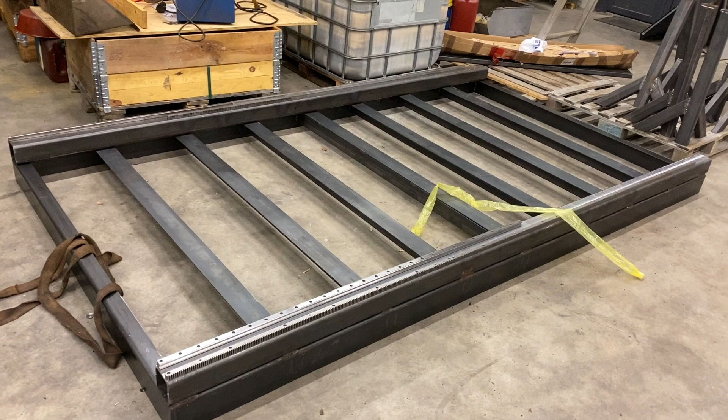Now I think we should concentrate on that CNC router, which is the thing I've been working on quite closely in the last few weeks. But let's first check the CNC frame we did a couple of months ago.

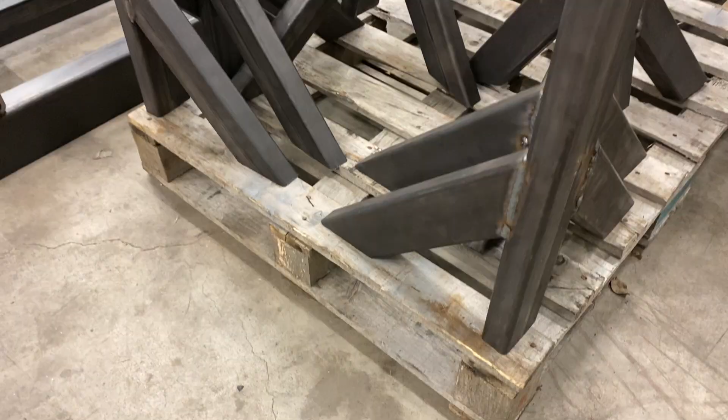So the frame you see here is a very heavy steel frame that now has been machined with very high precision to fit the linear rails and racks you see here. After the last video, I purchased the racks, and there are now mounting holes machined into those racks as well, and they seem to fit perfectly.

Last video I also put the legs together, but after that we concluded they may not be needed after all, because the purpose of this machine is to cut pieces from large plywood sheets.

It actually feels easier to use the machine when it's just on the floor, so you don't have to do any heavy lifting to get the plywood on top of the machine. But I will still stash the legs for later use if we decide someday to use them.

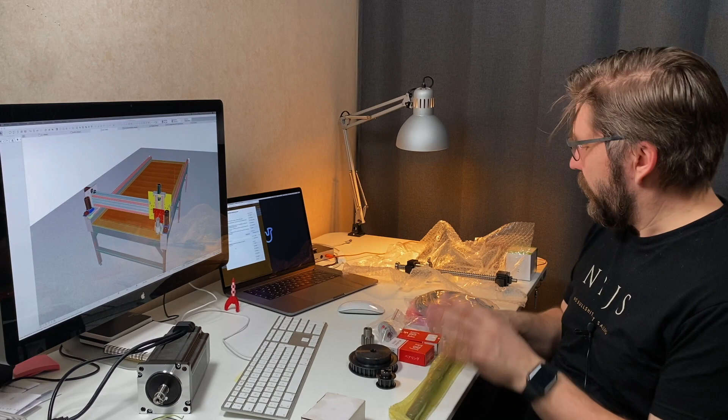So as you can see, the frame is now complete. Now I'm just waiting to move it from the workshop to the temporary place where I can put the machine parts together, and we'll come back to that in the next video, I believe.

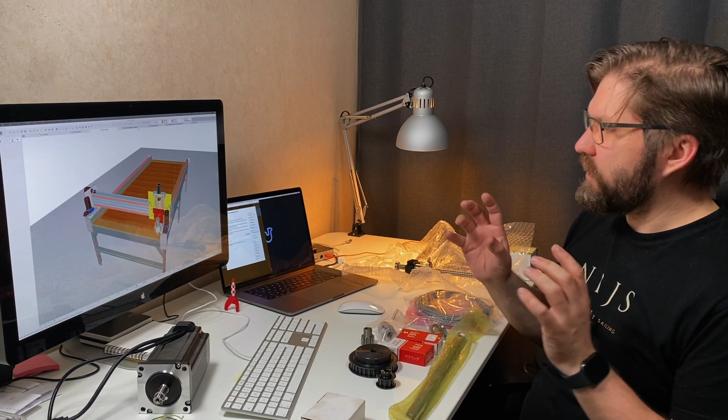During the last couple of months I've been ordering quite a lot of stuff, and there's just a part of it, and now there should be almost everything here. Basically the only thing still missing is the main profile for the gantry, and it should be on its way right now. After that I can really go finish and measure everything, and it should all be good. There are still some small things to look into, but mostly it should be quite okay. Let's dive into the plans and see what's changed since the last revision.

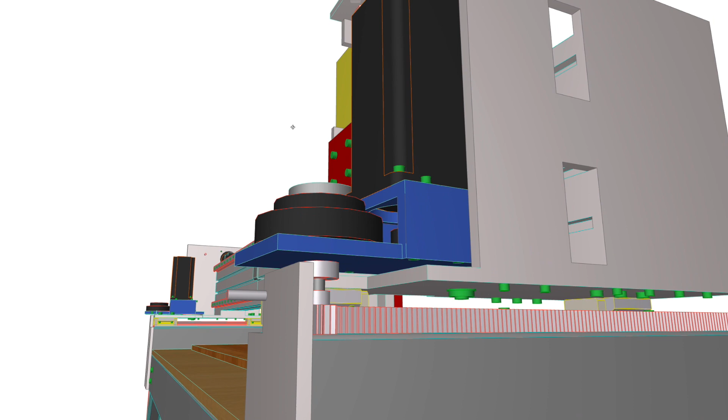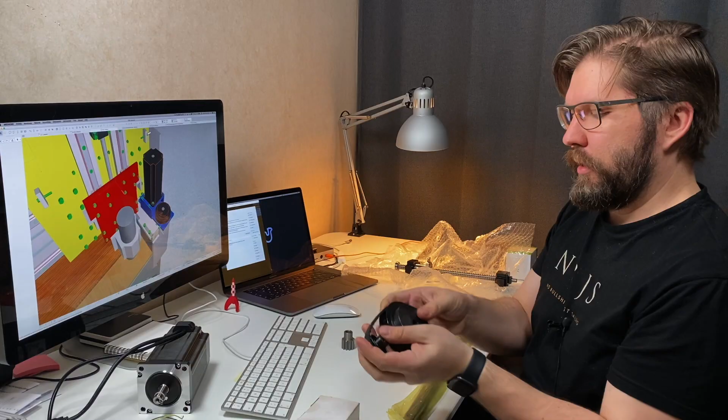So the obvious change here is the rack drive. This has been redesigned completely, and now there's this blue moving part that drives this pinion against the rack, and it has spring tension, so it flexes a bit if dirt or something gets between the rack and the pinion. It also has this belt reduction, which gives more precision and less force against the motor, so it's necessary not to directly drive the pinion with the motor, but have some kind of reduction in between.

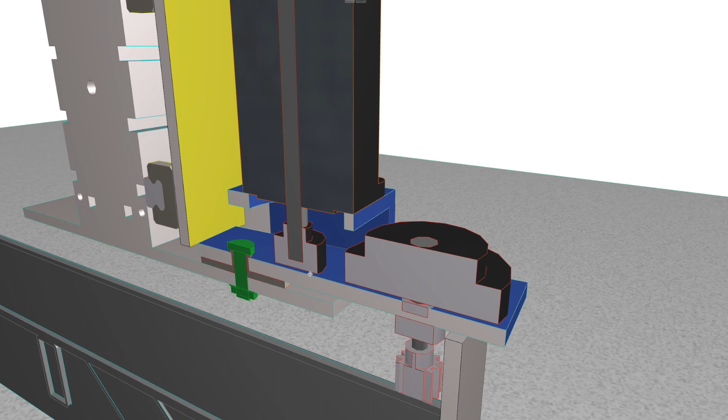There are a couple of custom shafts to be made with some bearings I have here. The whole moving unit is held by these bronze bearings, and there's also this Teflon plate that it's held against too, and it should work well. For that pinion drive there's going to be just normal ball bearings, so the shaft will go through both of these and have this pinion down there.

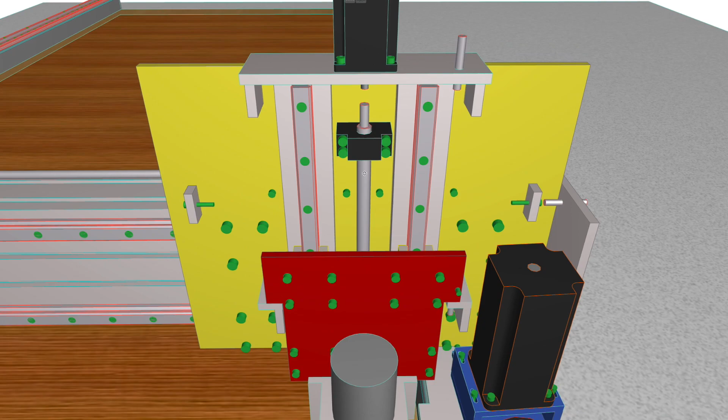So these are all here now, and I can finish the plans with these. And of course the motor itself, which is this one — there's the belt tensioning system and the motor mount included as part of that as well.

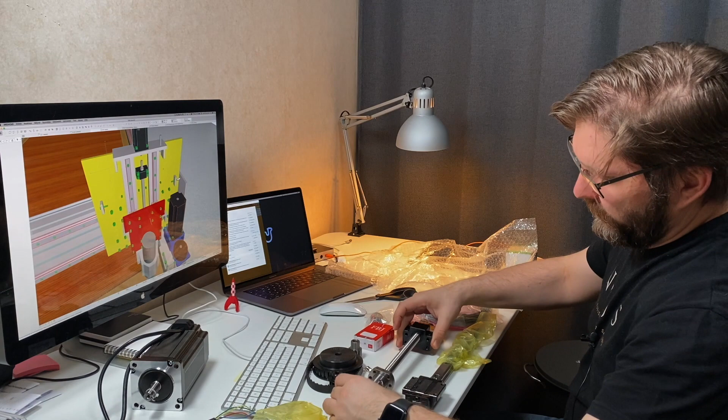Another bigger design — not a change, but a part where the design has moved forward — is the Z-axis area and this holding thing. So if we put this linear rail carriage in its place right here, like so, and here we have the Z-axis ball bearing thing.

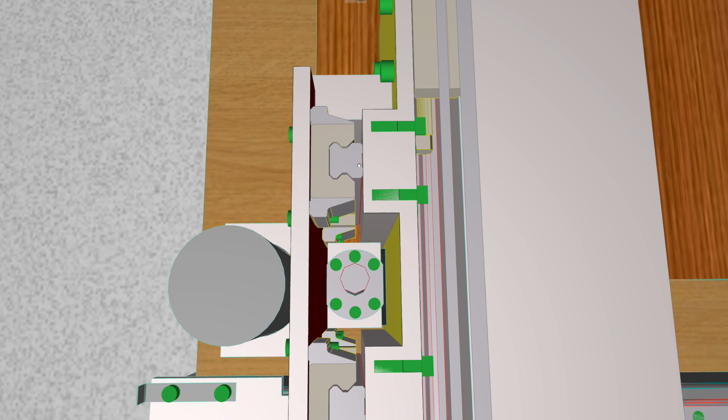You can see the level of these isn't really the same, so I had to raise this rail a bit to be able to put these on the same level on the other side. So these won't fit 100% without this kind of little fiddling, but now there are spacers under these linear rails and it should work fine.

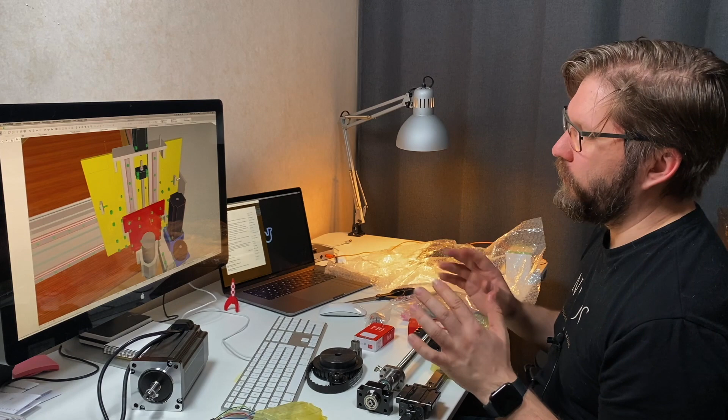But on the other hand, for the Y-axis, I didn't do it like that because I didn't want any additional thickness from that main beam, so I decided to move the ball screw on top of the profile so that I didn't have to do this thing like with the X-axis as well. I think it's easier to build and maintain that way.

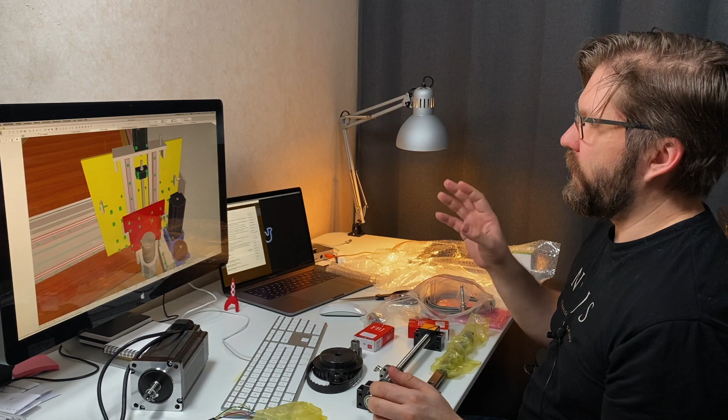In addition to all of this, there are also now places for sensors. There are these inductive limit sensors that will sense when the machine is at its limit, so it won't hit anything. Now there should be places for all of these. There are still some things to look into, but they are not that big anymore.

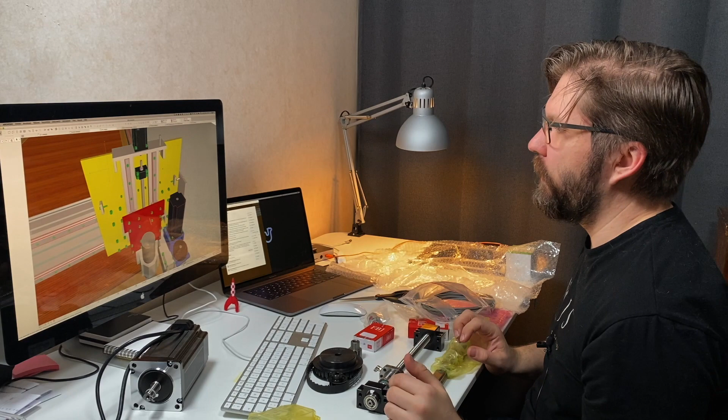I have to check all the screws and screw holes and things like that. Now all the mechanical parts should be here, except for the cable carriages. After the plans have been completed, we should be able to start manufacturing the aluminum plate parts, which is basically all of these extra custom-made things here. So I think that was all from the mechanical side.

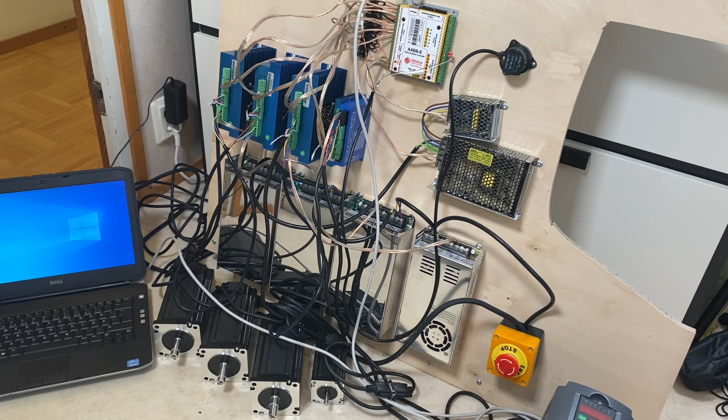Now I think we'll jump to the electrical side and take a look at how all of that works. So here we have the test arrangement, called the Frankenstein board.

All the electric parts have now connected here, and I wanted to test everything to make sure they work before I install them anywhere. I also wanted to make sure I order a big enough cabinet to fit all this stuff in, and of course it's going to be the biggest one I could find. But there's still not all the stuff in here yet. There's going to be, for example, some DIN rails for fuses, connectors, cable organizers, and stuff in between. It's going to take quite a lot of space, and this inverter is going to be installed in the cabinet as well.

I'll now try to explain everything easily so you could understand how this kind of CNC machine actually works. So we can think of the system as a combination of two or more inputs and two or more outputs.

Starting from this button here, this is the power input for all this machinery. It works with electricity, and the first input is the electric power that runs everything. From this switch, the power is distributed to all the parts, and these six boxes here are different power supplies that supply power for different devices.

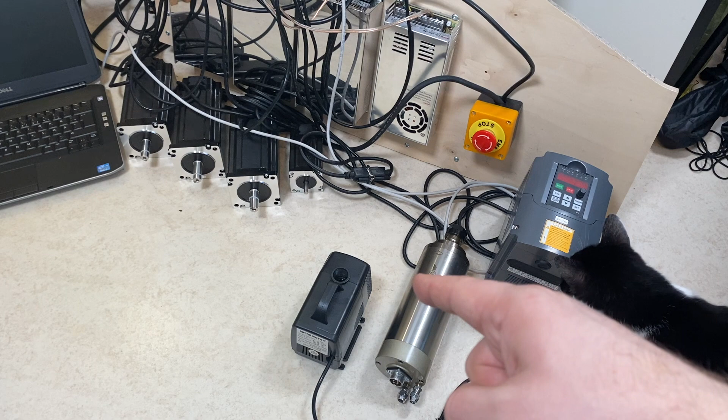The big ones here are power supplies for each motor and motor controller. The power comes here and is distributed to the motor power supplies and through them into the motor controllers that run these four motors. From this power source we also run the spindle you can see right there, which has this inverter power supply, and then there's the water pump that provides cooling water for the spindle. So all of these are powered by this one source.

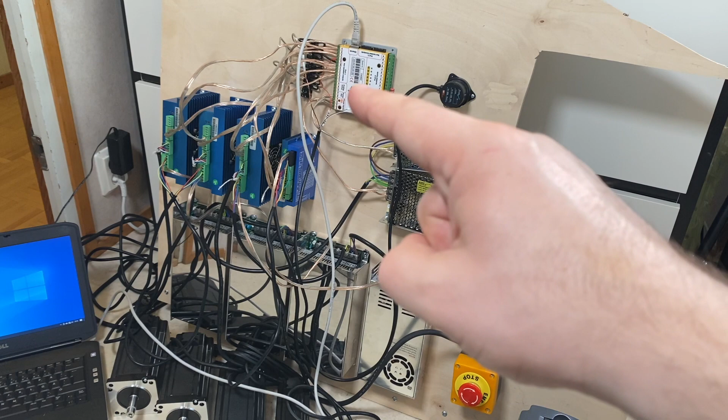Then there's these additional two power supplies over here that provide power for this motion controller and other smaller stuff, for example this probe receiver right here. But yeah, the power is the first input.

The two main outputs are the spindle that does the dirty work for us, and the second output is these motors over here that provide the movement for the whole machine. So they are kind of the output side of this machine.

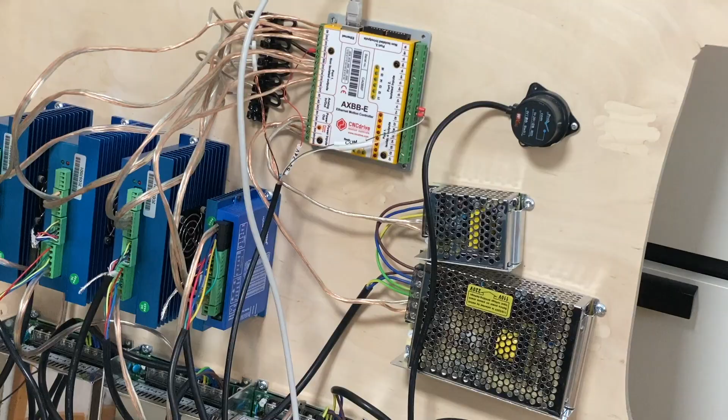But in addition to the power, we need some kind of information on how to move the machine, and that's the second input, which is the computer right here. The computer is connected via Ethernet cable into the motion controller, which is kind of the brain of the system. There are different approaches to controlling CNC machines, but I decided to go with this fancier option that should be more reliable and has a good amount of different inputs and outputs.

From the computer we get the CAD drawing of what we want to make, and turn it into G-code, which is then provided to the motion controller. This controller creates electric pulses, basically the steps, which the motor controllers then tell the motors to move. So the power supply powers this thing, and the computer provides the signal to guide where the motors should go. That's the basic idea here, it's not that complicated actually.

These motors here are stepper servo motors, and they're quite hefty ones. The big ones are 12 Newton meters and the smaller one is 3 Newton meters. Three of these drive the X and Y axis, and the smaller one runs the Z-axis, which is the up and down movement.

A stepper servo is different from a basic stepper motor in that it has an integrated encoder that provides information to the motor controller about where the motor is actually spinning. A normal stepper is just a dumb piece of equipment that does what it's told and doesn't provide any feedback. But with this, the motor controller actually knows how many steps the motor has taken and if any steps have been missed, because under high loads a stepper motor can stall and lose steps, losing accuracy. With these motors, that shouldn't happen.

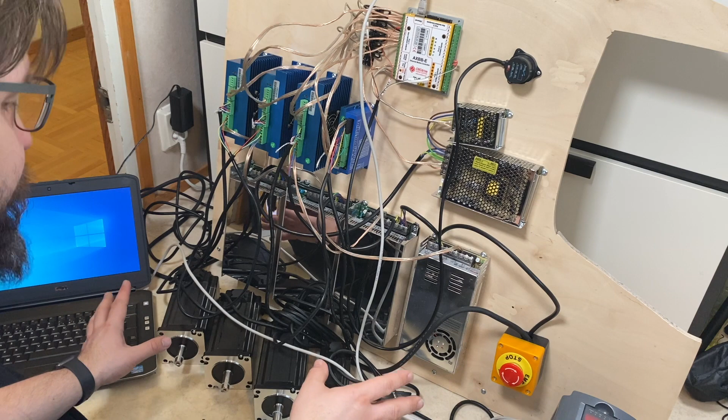Another control we have is for the spindle. This inverter power source accepts a signal from the motion controller to control the speed of the spindle from the computer, so you don't have to adjust the spindle by hand. There is, of course, some risk with that because this is a very powerful device. But now that everything is connected, I think we should make a test spin with this machinery.

The first thing we're going to do here is put the power on, and I will rotate this emergency switch to power it up. Now all kinds of lights appear here—you can see everything is on, all green lights, and the motion controller is on.

I have already connected the Ethernet cable to the computer, and we should start the software. Here we have a blue light that tells us there's a link between the computer software and the motion controller. Now everything should work with these arrow buttons here.

If we start with the X direction, in this direction, we can push the button here, and you can see the motor spinning when I press it. The Y is these two, and they should rotate in opposite directions because they are on either side of the machine.

Finally there is the Z-axis, which is used by the page up and page down buttons here. I'll just make a little setting to make it move a little faster, maybe you can even hear it. And everything works like a charm.